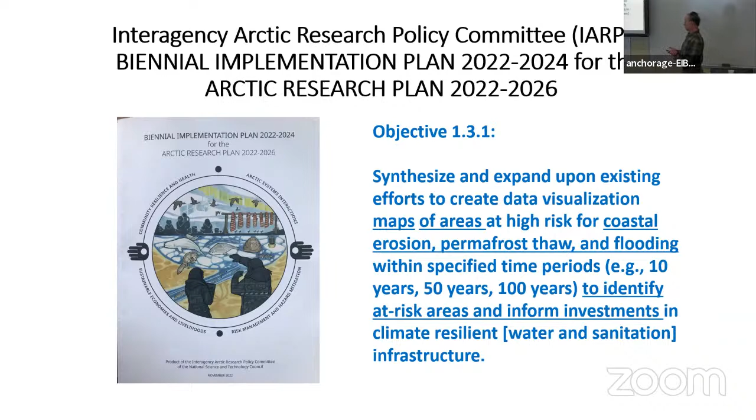In addition, the Interagency Arctic Research Policy Committee, IARPC, in their biennial implementation plan for the Arctic Research Plan, has identified the development of maps for visualizing coastal risks as a priority, coastal risks of erosion, permafrost thaw, and flooding. And they want to generate those maps in order to, amongst other things, inform investments. Which means making decisions, I think.

So, as I see it, in that context, the overall research goal of our research network is to develop methodologies for quantifying and communicating Arctic coastal risks, accounting for climate change. And why do we want to do that? Because we think it will be of assistance to decision makers and planners.

You know, if you think about that 184 communities on the Alaska coast, it would be just super helpful if we knew going forward a few decades what the anticipated cost of erosion would be, what would be the cost of flooding, permafrost thaw, etc., so that we can make really well-informed decisions about how to proceed.

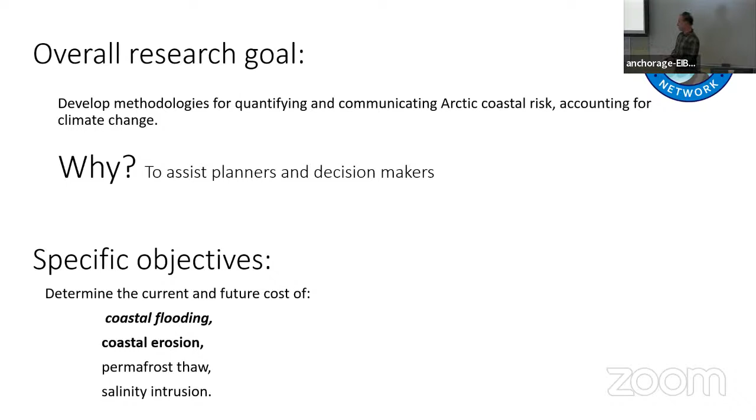So the specific objectives of my talk today are really to predict the cost of coastal flooding and coastal erosion. Other things that are in the work are predicting the cost of permafrost thaw and salinity intrusion. So I have two primary parts of this presentation. The first one concerns predicting the cost of coastal flooding. I'm going to do that with two different methodologies.

Methodology A is a generic methodology, which is predicting the cost of road flooding. We're actually going to focus on just the flooding of roads, not all impacts of flooding. And we're going to predict the cost of road flooding based on this unit cost of road flood exposure, which, thinking about it, is seeming like a reasonable way to go.

We're going to be able to check that methodology by adopting a second methodology, methodology B, where we estimate a cost of flooding based on computing the cost of flood mitigation, considering specific alternatives for mitigating the flooding. So all of this work is going to be focused on Hooper Bay, where we have a demonstration project.

And then in the second part of the talk, I'm going to shift to how do we go about estimating the cost of coastal erosion. And once again, I'm going to have two approaches. The first one is actually just stating the approach of the Division of Geological and Geophysical Surveys. They have an approach based on estimating the infrastructure replacement costs.

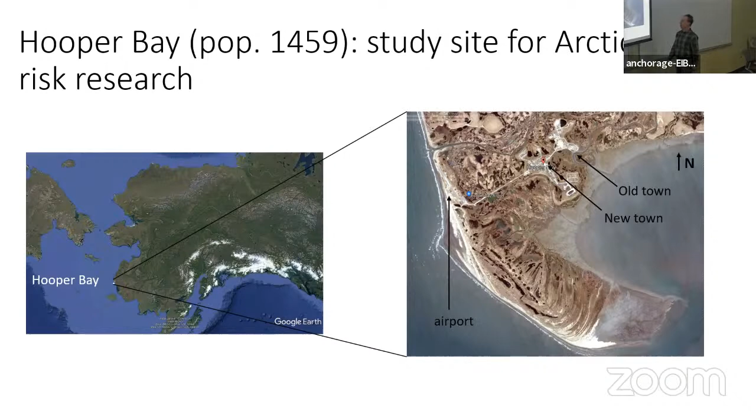But what I want to emphasize is how much infrastructure is really vulnerable to flooding in Hooper Bay. The airport gets flooded. The airport access road used to get flooded. It will eventually with sea level rise. It's currently not typically getting flooded. Houses are getting flooded. Buildings. Actually, in Merbok, the recent storm, 3 houses got lifted off their foundation, and a tank from the tank farm floated away. So it's very much vulnerable to flooding. There's also a power plant in Old Town and a water plant, which are vulnerable to flooding.

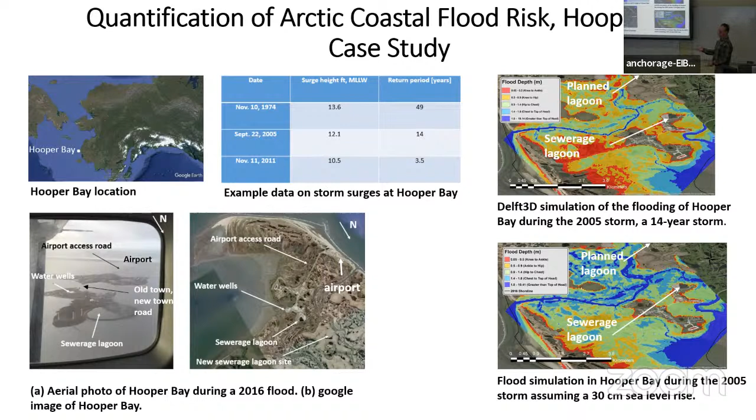These flood simulations are also going to figure prominently in the work that I'm going to talk about now about estimating the cost of flooding. So if you remember, I was going to talk about or introduce two methodologies for estimating the cost of flooding. This first one is basically a generic approach. There's a 4-step procedure here. First, we develop a coastal flood model for Hooper Bay, and I've actually showed you some output from that model. And we use it to simulate 9 historic storms, the largest historic storms between 1992 and 2011.

The second step will be to compute the annual flood exposure, which has units of kilometer hours per year. We're going to be talking about that quite a bit. We're going to compute the annual flood exposure for that section of road for which a flood mitigation project has been conducted, that road, airport access road, and for which cost data is available. This annual flood exposure accounts for the length of roads flooded and the duration of the flooding in a typical year.

The third step will be to develop this unit cost of flood exposure, which is going to be the ratio of the flood mitigation project, the airport elevation project, relative to the annual flood exposure of that road segment that is mitigated by that project. The fourth step will be to make use of that unit cost of flood exposure to project community-wide flood risk into the future. And the equation for doing that is shown there.

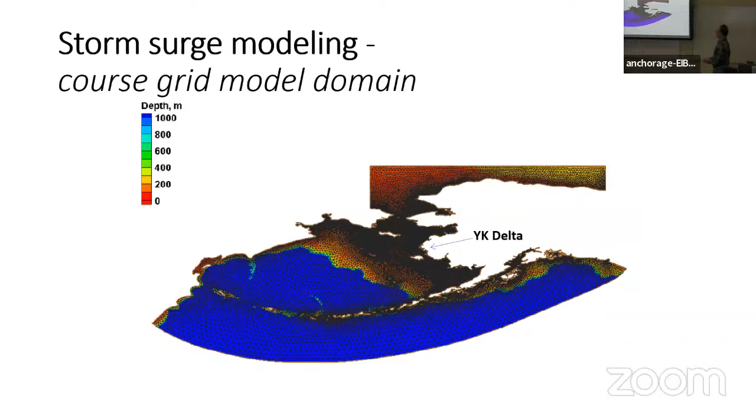We used the output of simulations of historic storms that the Corps did to drive a high resolution coastal model. So this high resolution coastal model domain is right here. It covers an area 150 kilometers by 200 kilometers. The resolution in this coastal domain is 170 meters, meaning every 170 meters you have data on flood depth. And then where you see this little square, that's basically Hooper Bay. And there we have even higher resolution, 20-meter resolution, which really gets to the scale where you can really understand the distribution of flooding and flood depth.

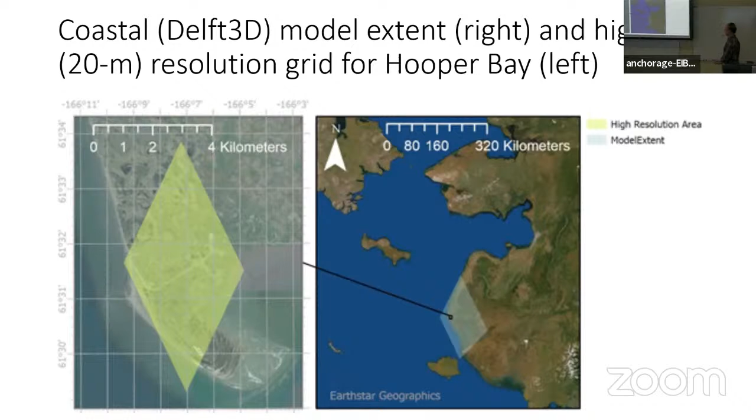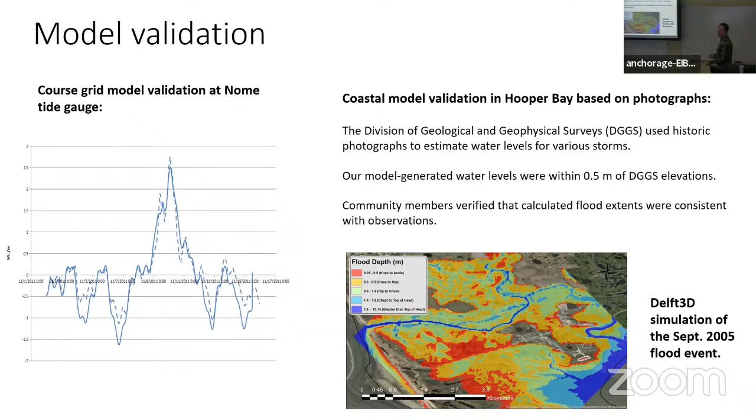We also have some validation of the coastal model accuracy. We don't have a good gauge there like they do at Nome, but fortunately the DGGS analyzed historic photos and estimated storm heights from some of the prominent historic storms. And we've compared our model generated storm heights to the photos, and we find that our calculations are within 0.5 meters of what the photos indicate. Also, community members have said that the flood extents in particular simulations are reasonable. So it's not perfect, but we have confidence that this is a reasonable model.

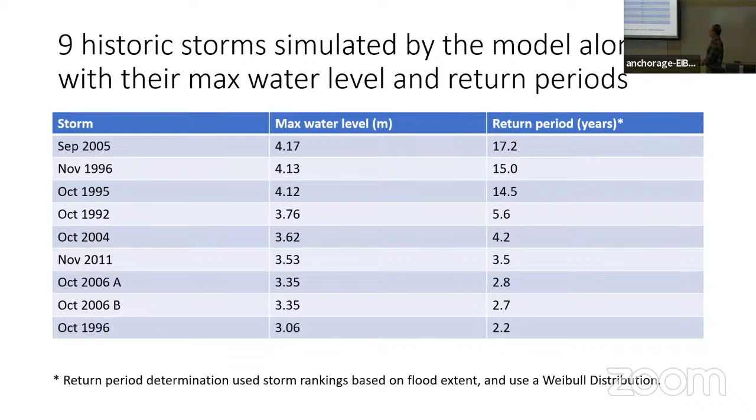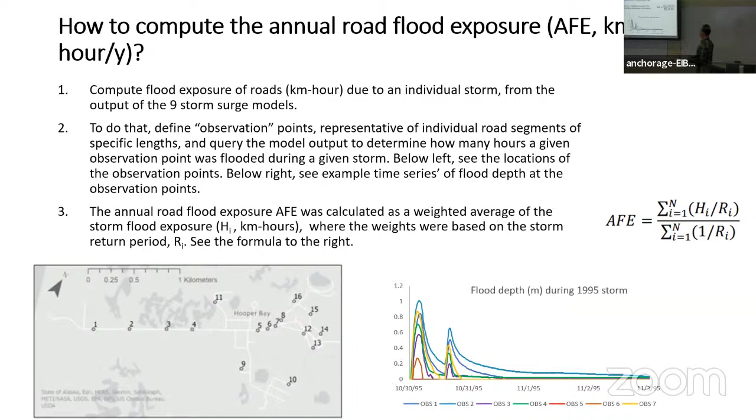And then the next step is to actually compute the annual road flood exposure, AFE, which is a weighted average of the individual storm exposures. So the equation is to the right here, and we say it's a weighted average. What does that mean? Well, what we mean is that storms that happen fairly frequently, like a 2-year storm, will be given a much higher weight in the overall average than a storm that happens very infrequently, like a 17-year storm. So we got this annual flood exposure, and we actually calculated it for a section of that airport access road.

Essentially before and after the flood mitigation project, to show how much the flood mitigation project reduced the annual flood exposure. So our third step is then to determine the unit cost of flood exposure, which is the ratio of the cost of the flood mitigation project to the annual flood exposure of the road section where the flooding was mitigated. So again, we have more detail on that.

So the cost of the airport road flood mitigation project, the raising of this airport access road, was $8 million. And since it had a 30-year design life, the annual cost was $267,000 per year. With the flood modeling, we computed the annual flood exposure of this particular airport access road to be 9.6 kilometer hours per year. And so this led to this unit cost of flood exposure, $27,900 per kilometer hour.

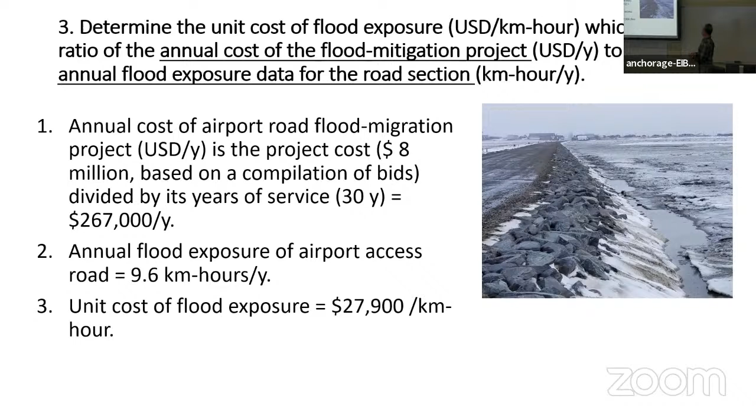So it's a little bit funny. You guys can tell me what you think about it at the end. But I think it's appropriate because it allows for relatively straightforward estimates of flood risk. And that's what we do in step 4. So in step 4, we take advantage of this unit cost of flood exposure that we've calculated.

In step 4, we're interested in computing the community-wide flood risk for the 2020 to 2050 time period. And the way we do that is we use that unit cost that we just determined, and then we calculate the average annual flood exposure for 2020 to 2050. And the product of those two is giving us the flood risk for Hooper Bay for all the roads between 2020 and 2050.

And so this is the math. We had determined the unit cost to be $27,900 per kilometer hour. The average annual flood exposure between 2020 and 2050 was 16.7 kilometer hours per year. And that gave us that $465,000 per year as a flood risk for Hooper Bay between 2020 and 2050. If you take that annual rate and multiply by 30, you get $14 million. So that's our first estimate of the cost of flooding in Hooper Bay, $14 million for the time period 2020 to 2050.

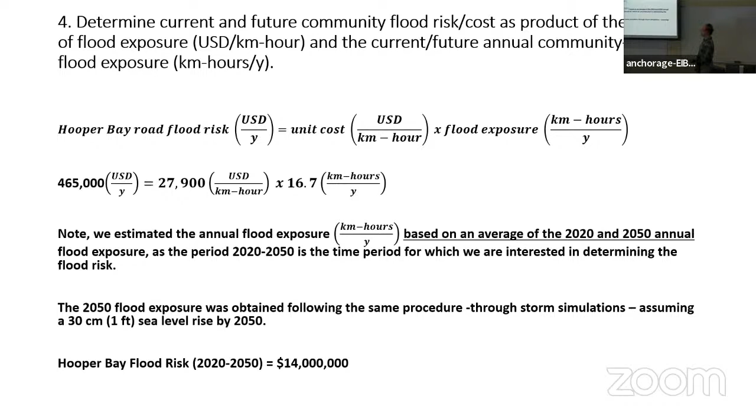So we're going to move to methodology B. Methodology B, we're going to make use of that flood model. We're going to use it to design 3 alternative approaches to mitigate flooding. First approach is raising the elevation of the roads that are flood prone. So we need to know how high the flood is in order to figure out how high to raise the roads. That's the first alternative.

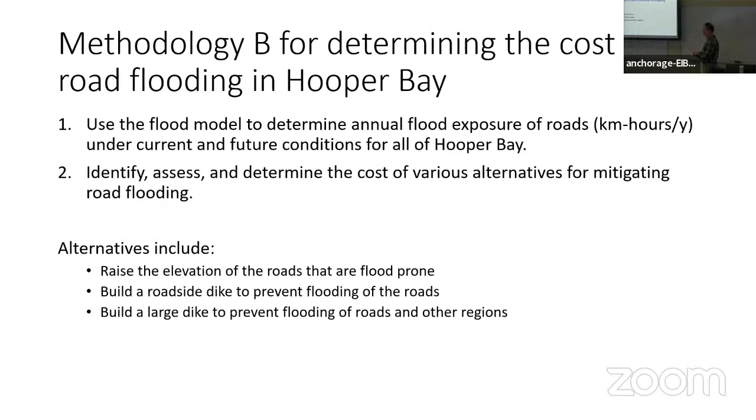The second alternative is to build a roadside dike to prevent flooding of the roads. And that's a roadside dike around Old Town. You'll see why in a second. And then the third approach is to build a large regional dike. And there's some advantage to that because you're generating big areas that are safe from flooding, we think. So all of those objectives require that we simulate these storms for the 2050 period.

And this is just giving you a flavor for what the flood depths would be like in the year 2050 for the community of Hooper Bay. So this is actually the peak flood depth considering all the big storms, assuming that they happened in 2050 with a 30-centimeter sea level rise. And one of the things that's noteworthy, I believe, is the flood exposure of Old Town. You can see this ring road around Old Town is essentially flooded. In addition, the connection road between Old Town and New Town is also flooded.

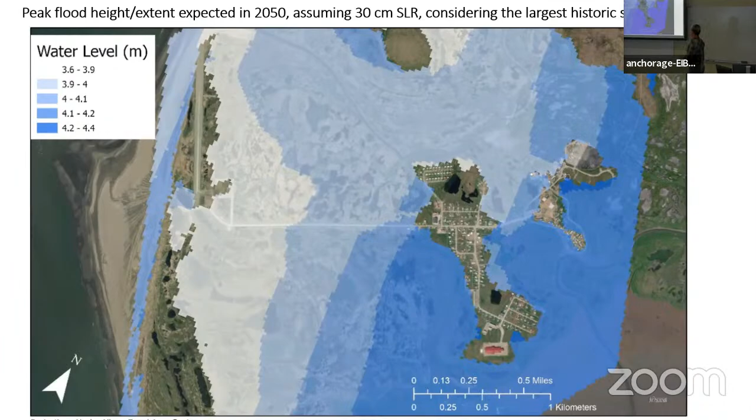So now I'm going to give you a little bit more information about those 3 alternatives that we considered for flood mitigation. So there were basically 3 stretches of road in New Town that needed to be elevated to prevent flooding in 2020 to 2050. In Old Town, you need to elevate the whole ring road, essentially. And you also need to elevate the road connecting Old Town and New Town.

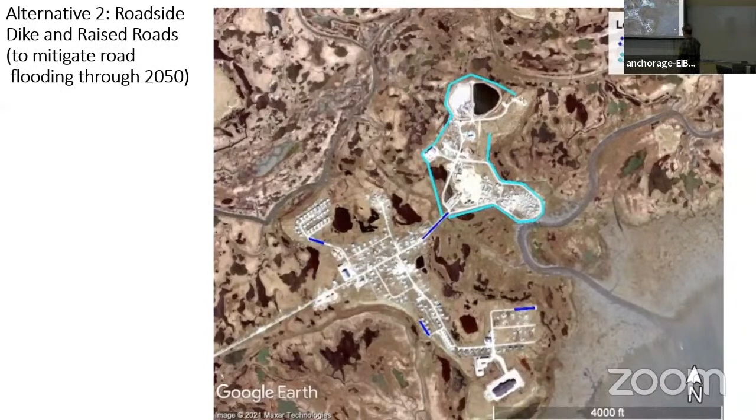Alternative 2 involved building this roadside dike around Old Town. So rather than raise the elevation of the roads, we thought, well, why don't we just build a dike around the whole sub community, if you will. We still have to raise the individual roads in Newtown, as well as the road connecting Old Town and Newtown. But it is an alternative that we explored.

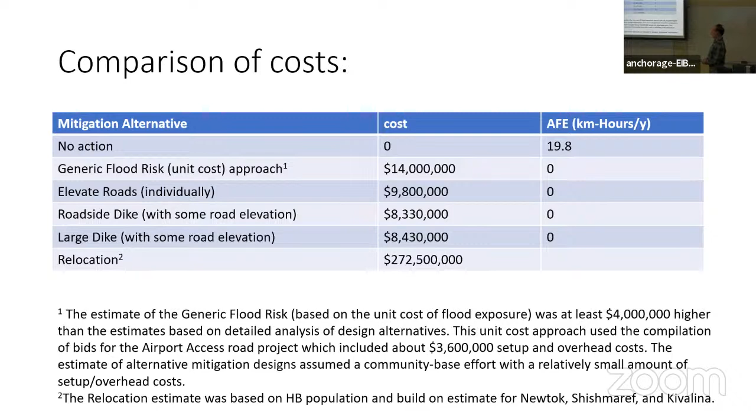So in my view, this work demonstrated a simple but realistic way to estimate the risk costs of road flooding in Alaska coastal communities. The comparison of methodology A and B indicates that the results are reasonable. With some additional thought, I believe this approach could be expanded to estimate the cost of flooding of other types of infrastructure. And also we can broaden the application and cover all of YK Delta or all of Western Alaska with this approach, just to get an idea of what are the flood costs that we're anticipating in the next 30, 60 years.

So the second part of my presentation. If you guys are jumping up and down with questions in your mind, I'm willing to entertain a question or two now, if the organizers let me do that. But otherwise, I'll move on to part two.

Okay, here's a quick question. It looked like most of your options there are pretty close to the $8 million cost of the access road to the airport, where I think you had some real numbers. Was that not about $8 million as well to elevate it? You said 6 feet. Yeah, it was 8 million. Yeah. So it's just kind of an observation that's real close to a lot of what your different mitigation measures and alternatives ended up being. Yeah. 3 or 4 of them.

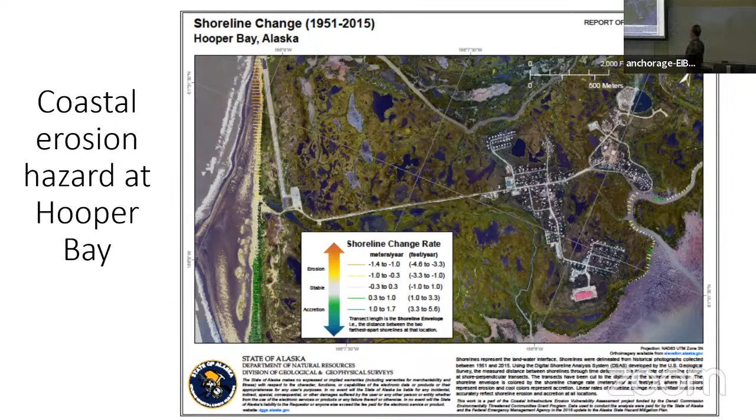And one of the things that you want to do if you're building a coastal structure is you want to protect the toe, because the way coastal structures fail is if there's scour at the toe of the structure, then the whole thing can topple over. So the key thing for any kind of seawall, such as this sheet pile wall, is to armor the toe of the structure.

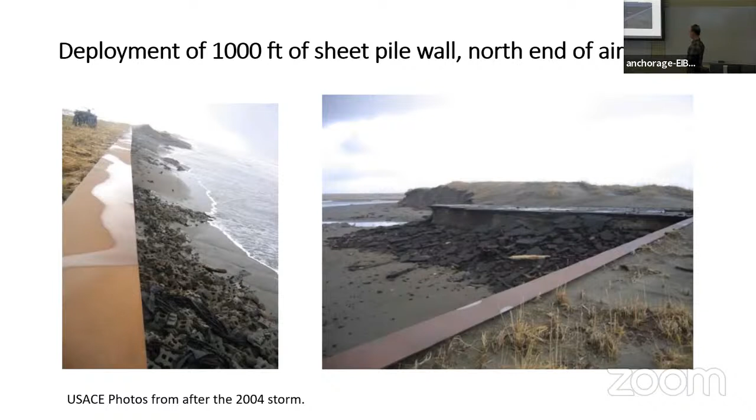And this is sort of done ad hoc. And so in that same 2014 to 2016 project where they raised the elevation of the road, they also went back and sort of improved the scour protection of the toe of that sheet pile wall. They built basically a 413 foot long rock revetment.

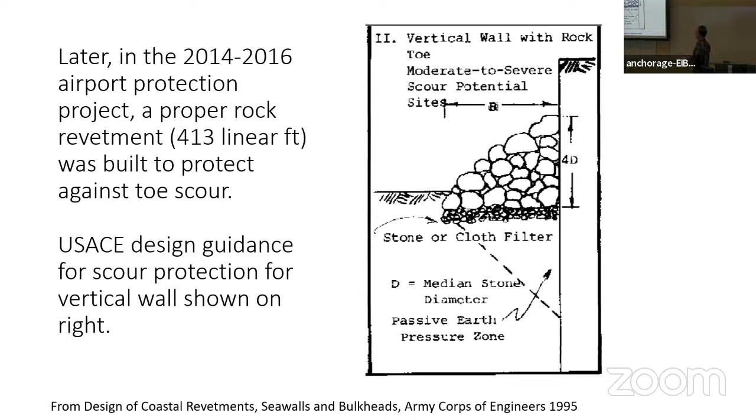So this is, let me just take a break here, shut off my phone. Excuse me.

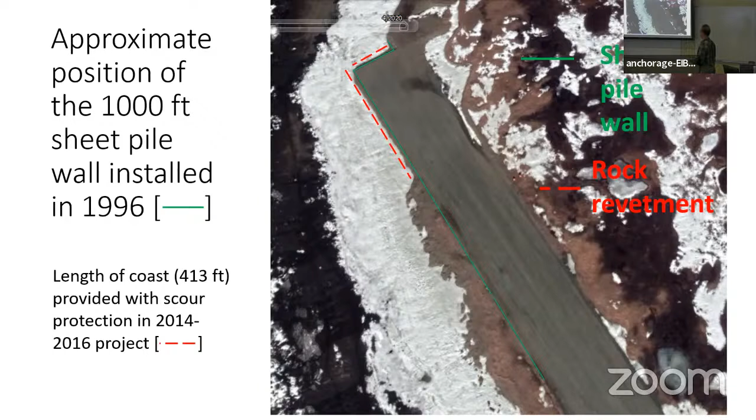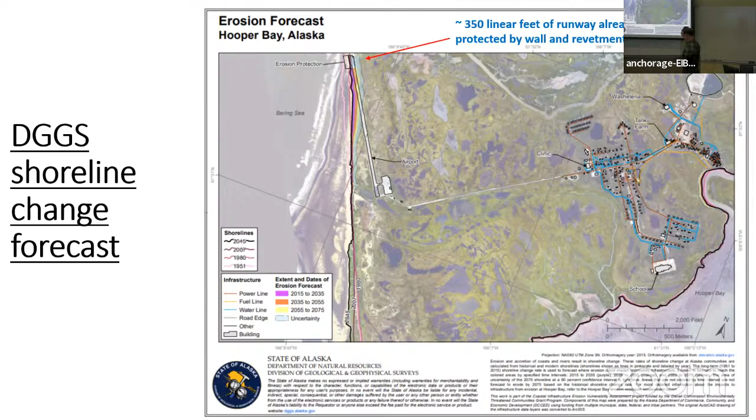And in fact, there's an additional 461 linear feet of runway that will be subject to erosion in the 2023 to 2055 timeframe, according to those DGGS projections.

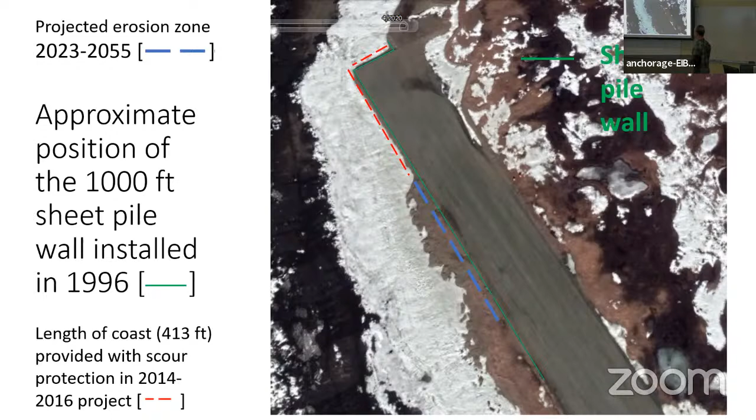And so now we're going to get to the cost estimation approach. So DGGS, I thought, provided really great service to the state by using these erosion projections as a basis for estimating the cost of erosion. What they did was they basically looked at how many linear feet of runway would be impacted by projected erosion, and then determined the replacement costs of rebuilding that runway if it was impacted by erosion, and used that as a cost estimate.

So this is just coming from their report pretty much. So in the time frame 2035 to 2055, they projected 463 linear feet of runway would be impacted by erosion. And then ANTHC gave DGGS some estimates of the cost of replacing airports. And based on that information, they came to a cost of 4.6 million to estimate the cost of replacing the airport runway impacted by erosion in the 2035 to 2055 period. So I think that is the first estimate that I'm presenting here.

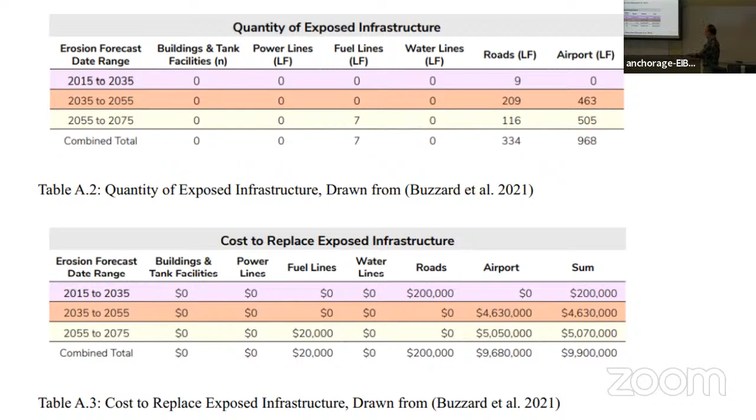And when we looked at it, and this is in particular Ethan Hunstiger's work, we thought about it from the point of view of, well, the actual cost of erosion is really the cost to mitigate, to protect the infrastructure against any erosion. And so basically we saw this 460 linear feet of runway, and we thought, well, what's really going to happen to protect against erosion there? Well, they're just going to extend this rock revetment that they had already built to protect the toe here. That's 460 feet.

And so we used the costs from the 2014 to 2016 project to determine that the cost of building that revetment is $5,240 per linear foot. And then we used the 463 feet of exposed runway that was projected by DGGS to arrive at a cost of erosion of 2.4 million, which is obviously significantly below the 4.6. It's a different estimate, but I'm suggesting that maybe this 2.4 is more realistic for what the short-term cost of erosion will be as far as mitigating the threat to the airport.

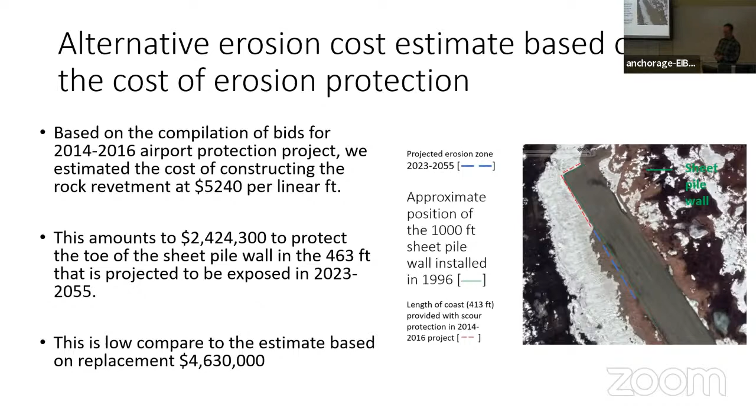So the conclusions from this section of the presentation, in my view, are: the DGGS developed this cost of erosion based on estimating the cost of replacing infrastructure impacted by erosion. They came to 4.6 million for the airport in that 2023 to 2055 timeframe. We looked at it with the second estimate approach, arriving at the cost of protecting against erosion, which would actually be a little bit lower, 2.4 million.

So these calculations suggest that it's going to be less expensive to protect the existing infrastructure rather than to rebuild it somewhere else. And this general finding is also what I've read in a recent IPCC report. When people look at the economics in this situation, very often there's very valuable infrastructure behind the shoreline, and it's relatively inexpensive just to defend, to arm the coast, rather than lose very valuable land.